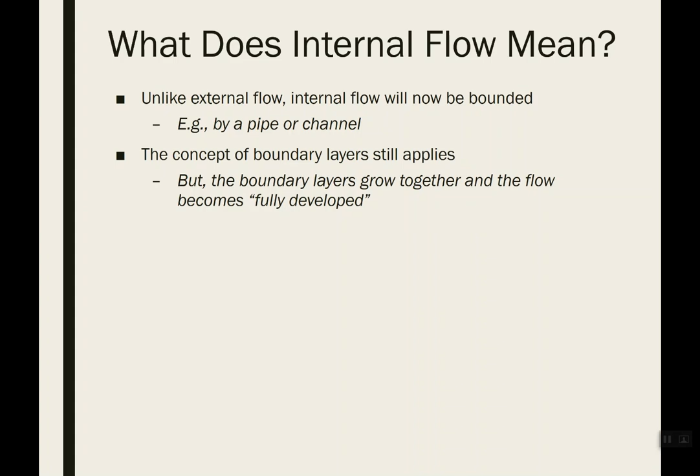Similarly, the thermal boundary layer, or thermal profile, is a little bit different, so fully developed is going to be defined a little differently, and we'll explain that as we go. Okay, so as I mentioned...

There's still this idea of a boundary layer. If you recall, when I talked about external flow, I used the example of flow going over a table. When the flow interacts with the leading edge of the table, you start to get friction happening, and heat transfer may occur if there's a different temperature between your surface and the bulk fluid. That still happens with flow through a pipe, except it only happens at the entrance where that boundary layer is still forming and growing - that's what we call an entrance condition, before those two boundary layers converge.

Once these boundary layers start to grow, eventually they run into each other and you get this constant velocity profile. From this point on, if you took little snapshots of the velocity profile, they'd all be identical going forward. In terms of heat transfer, your system might behave a little differently in this entry region compared to the fully developed region. The good news is, in the fully developed region, things level out and become constant, and it's much easier to deal with them mathematically.

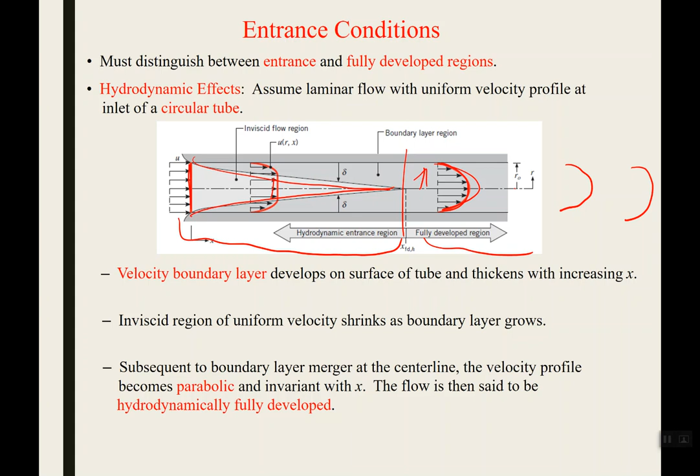So the velocity boundary layer develops on the surface of a tube and thickens with increasing x. You get this inviscid region where the uniform velocity shrinks as the boundary layer grows - here the velocity is all constant and uniform, which is called plug flow, which you'll learn about in kinetics, I believe. That inviscid region shrinks, and you get to a point where the velocity is never constant with respect to r, but it does become constant with respect to x.

The way you solve for the velocity profile is by doing a momentum balance. We don't really use that much in class other than being aware that you have this changing velocity profile with respect to the radius of your pipe. I'm not going to go into depth on that derivation unless you want me to—I'd be happy to do that in a later lecture, but I doubt you want me to. So you do a momentum balance and look at the shear stresses and how the different layers of fluid interact with each other, and you'd solve that to end up with an equation giving velocity as a function of r.

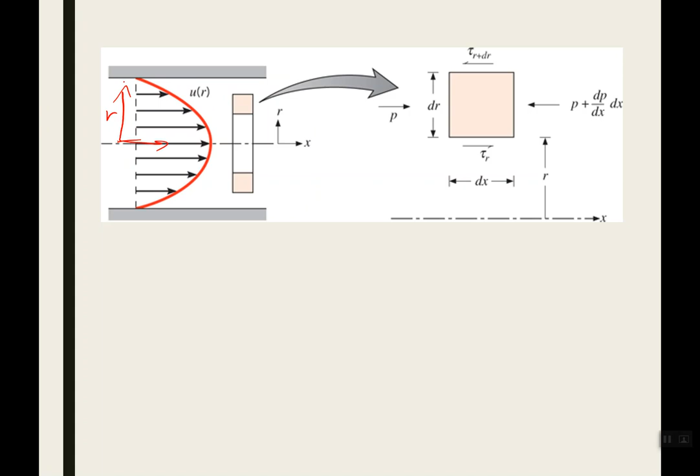So here's r. The x velocity is going to be highest at r equals 0, and lowest at r equals the inner radius of our pipe. We'll frequently be aware that there's an actual velocity profile, that the fluid is flowing fastest at the center of the pipe, and if we have a no-slip condition, it'll be 0 at the edges. We'll be aware of that general concept, but typically think of things in terms of the mean velocity.

The mean velocity is really just what you'd think of from your 2800 class—remember the formula, m dot equals rho times velocity times cross-sectional area. What you're really getting is the mean velocity, and instead of treating our velocity with some sort of shape, we just say, what's the actual mean, and treat the whole fluid as if it were all at that mean. You can get the mean velocity by integrating, if you knew the actual velocity profile. So if you had u as a function of r and x, you'd integrate that over the entire cross-sectional area, divide by rho times the cross-sectional area, and get the mean velocity.

So we won't really need to deal with that much other than remembering there is a velocity profile, but we'll typically just assume the velocity is uniform by calculating or using its mean velocity.

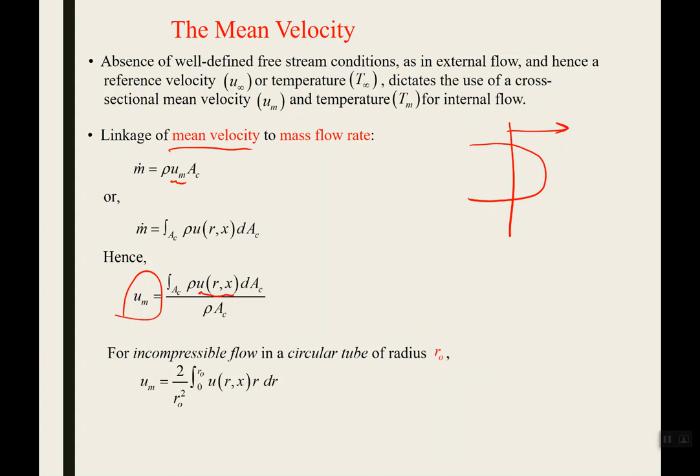We talked about entry lengths, just like with fluid flow over a flat plate, where when you encounter the leading edge of the flat plate, there's a different velocity boundary layer and a different thermal boundary layer. Recall we had formulas to calculate the velocity and thermal boundary layer thicknesses. I want you to remember that we treated velocity boundary layer and thermal boundary layer differently. Similarly here, you might have different hydrodynamic entry lengths than thermal entry lengths—your velocity profile may take a certain distance to develop, and that may differ from the distance it takes your thermal boundary layer to develop. Entry lengths depend on whether the flow is laminar or turbulent, which depends on the Reynolds number.

A Reynolds number for flow through a pipe or channel is defined as rho times our velocity times d divided by our fluid viscosity. That d has a subscript h, which refers to the hydraulic diameter. In the case of a circular pipe, the hydraulic diameter is just the diameter, so nothing to worry about there.

If your pipe is non-circular, like a square or rectangular channel, you calculate the hydraulic diameter as 4 times the cross-sectional area divided by p. Any guesses as to what p is? The perimeter, yeah. So as a sanity check, let's calculate the hydraulic diameter for a circular pipe. What is the cross-sectional area for a circular pipe?

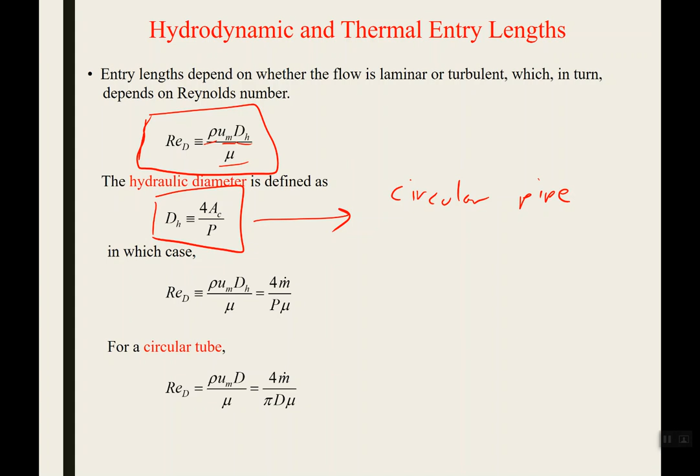Pi r squared, great, pretty easy, that's like 8th grade math. We can also express that in terms of diameter: 4 times A sub c, so pi fourths times the diameter squared. What's the perimeter of a circular pipe? 2 pi r, or pi times d. So the 4's cancel out, pi cancels out, and that ends up just being equal to d. So nothing to worry about.

We just use diameter to calculate Reynolds number for a circular pipe. But if it's not circular, then you'd have to go through this calculation of calculating the hydraulic diameter. So for a circular tube, our Reynolds number is just how we've always, the Reynolds number that we're familiar with, and you can put that in terms of mass flow rate by doing some algebraic manipulations.

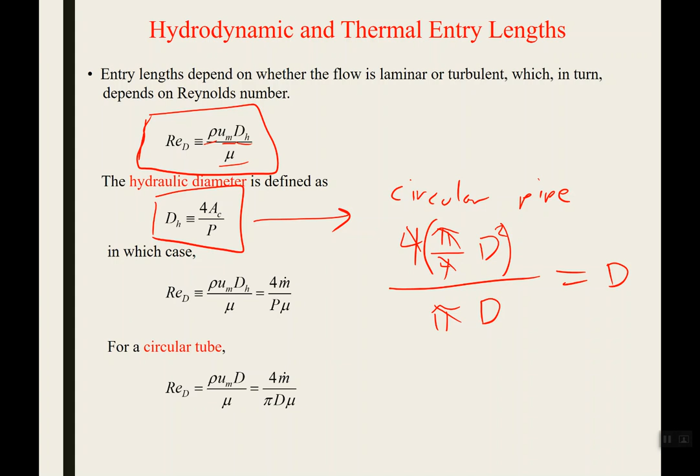Okay, so I've launched an interactive problem. I want you to calculate quickly what is the hydraulic diameter of a rectangular tube that's 5 centimeters wide and 3 centimeters tall, in centimeters.

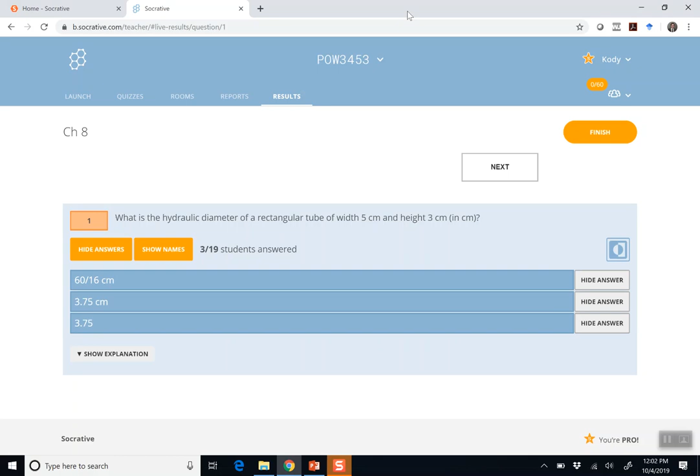I should have hidden the answers. Okay, so it is 3.75 centimeters. Good job.

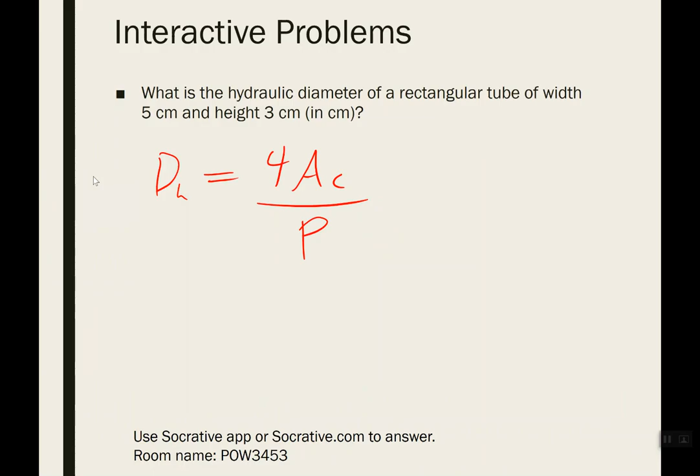So the hydraulic diameter is going to tell us a little bit about what the entry length is. Basically, this entry length is when those boundary layers are still developing, what happens at the very beginning of our pipe is going to be different than what happens after the flow becomes fully developed later on in the pipe. So that's sort of the motivation for talking about entry lengths, is we'll have to treat that entry length a little bit differently from a heat transfer point of view than we will the rest of the pipe.

So I'm sticking with the book standards. According to this particular textbook, the onset of turbulence occurs at a critical Reynolds number of 2300. What's the number you're used to from fluids? 2400. Okay, so this is about in that same range, this is not exactly a perfect science. So you'd start to get transition to turbulence when you have a Reynolds number of 2300 or greater.

And if it's above 10,000, then you can very safely assume that your flow is fully turbulent. So we get these little rules of thumb that tell us how long is our entry length, or how long does it take those boundary layers to develop, what's the section of pipe that we need to treat differently than the rest of the pipe.

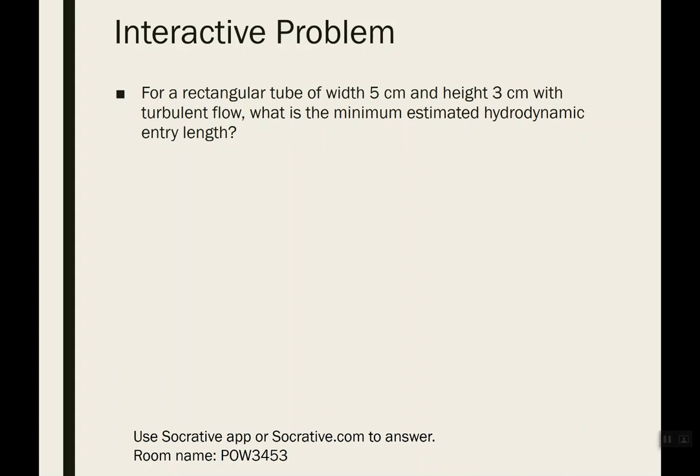So it's turbulent flow. Our hydraulic diameter was 3.75 centimeters. So we're asking for the minimum hydrodynamic entry length, so we'd use this 10. We'd assume that after 10 pipe diameters, our flow would be fully developed hydrodynamically.

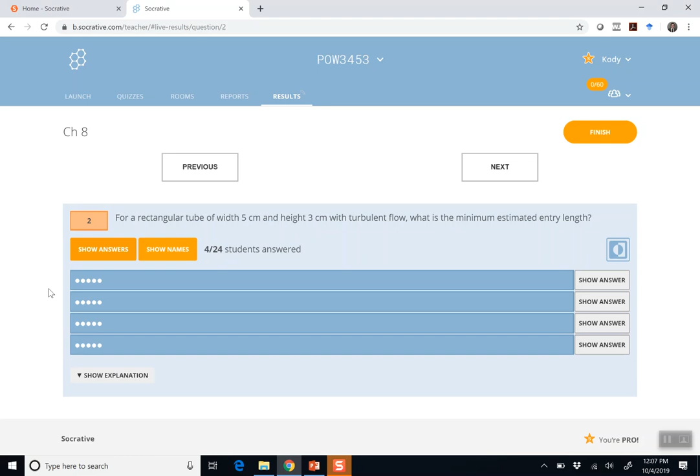All right, great. So our hydrodynamic entry length would be 37.5 centimeters. So what that means is for the first 37.5 centimeters, we're still going to have those boundary layers developing. After that, our flow is going to be fully developed, and we can treat our velocity profile as being fully developed. It'll also have some heat transfer implications that we'll discuss later.

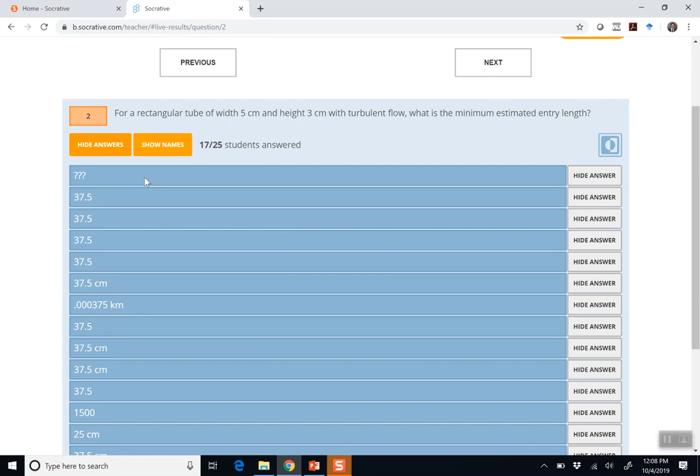Okay, so let's say that we have a pipe that is 200 meters long, and we're asked to do heat transfer analysis on that pipe. So our pipe is 200 meters long. How much of an impact is that hydrodynamic/thermal entry length going to have on our pipe?

Say that again? For the same pipe? Yeah, same pipe. Not very much. Yeah, so if our pipe is 200 meters long, and this is the first 37.5 centimeters of our pipe, it's really not going to matter. So in that particular case, we could say that our entry length is sort of negligible, and we could just treat the whole pipe as being fully developed, which makes our calculations a lot easier. Frequently, the problems will assume that flow is fully developed all the way down the length of our pipe.

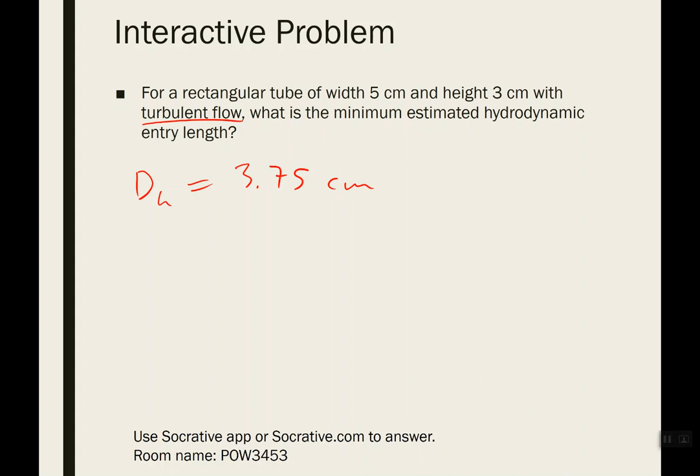Okay, so we can also get thermal effects. Similarly, when that flow enters our pipe, if we're assuming that it enters all at uniform temperature with respect to R, if we have a heated pipe, that heat is first going to penetrate the outermost fluid, and then eventually that thermal boundary layer is going to form. When those two thermal boundary layers merge, the flow is said to be fully developed here.

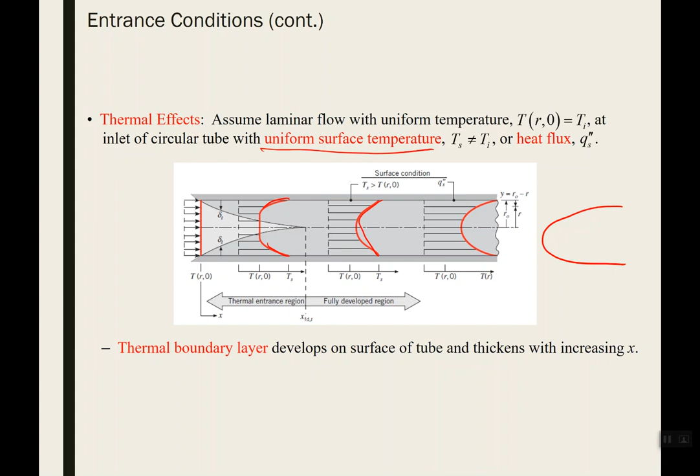Except there's a key difference here. In this particular case, if we had uniform surface temperature of our pipe, for example, what we would actually witness is that this gets more and more elongated the further down you go, because the pipe surface temperature stays the same, but your inner fluid still has this more extreme temperature difference. So we treat this a little bit differently.

Okay, so similarly to the mean velocity, there will also be a mean temperature, and our textbook treats this mean temperature, they denote it as T sub with a subscript M. I don't personally love that, but I'll try to stay as consistent with that as I can. So it's important to remember that there will be temperature gradients radially in your pipe. However, we'll typically treat our heat transfer correlations in terms of the mean temperature.

So we'll assume that our temperature is going to change with respect to X. That fluid, if it's a heating application and the pipe surface temperature is constant, our fluid's going to get hotter and hotter the further down it goes. But in reality, we'd still have temperature changing with R, but we could calculate the mean with respect to R so that we're only dealing with temperature change with respect to X.

So that's done similarly by taking an integration. We'd be integrating from 0, where the radius is 0, the very center of our pipe, and we would calculate the velocity times our temperature. Notice the temperature here is a function of both X and R. So we integrate that over the whole radius, and we end up with our mean temperature, which is a function of X only, because by taking the mean, we're going to neglect any temperature change with respect to R.

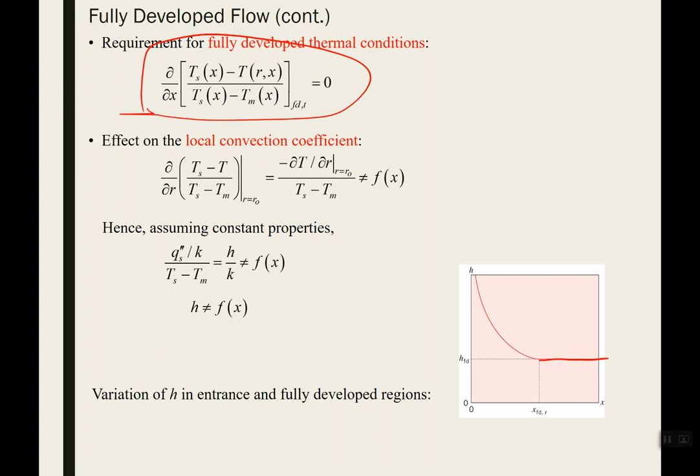Okay, so this mean temperature—I want to carefully explain again, the mean temperature means we're averaging our temperature with respect to R, but it's still going to be changing with respect to X. So we're basically treating our fluid as being uniform in temperature with respect to R, but it would be changing as the fluid is heated or cooled going down the pipe.

So to determine our mean temperature, we're going to start by doing a derivation. This is going to be a similar approach to when we've been using the heat equation or the thin fin equation. We're going to start by taking a differential energy balance. This is going to be an important concept to internalize.

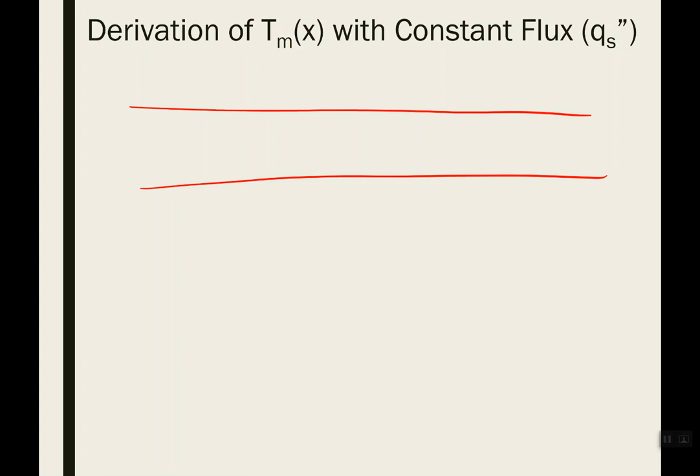If this is our pipe with X, we have our fluid coming in at a certain mean inlet temperature. Our approach here would be we want to calculate what's our mean temperature as a function of X. So I want to open this up to you—what should be our approach here to calculating our mean temperature as a function of X?

You're not raising your hand, you're just thinking, okay.

So we could do an energy balance here. We would take our pipe and break it up into these discrete volumes. Let's say we're going to look at this particular volume, so we're going to have flow coming in and flow going out. We're also going to have energy coming in with a constant surface flux of Q sub S.

Okay, so how do we do an energy balance? Accumulation—and I didn't specify this, but let's do this at steady state, so our accumulation will be 0. Then we're going to have in and out. I also didn't specify this, but let's assume we have no generation, just a fluid flowing through a pipe. This is a little bit different than the rate terms we've used before.

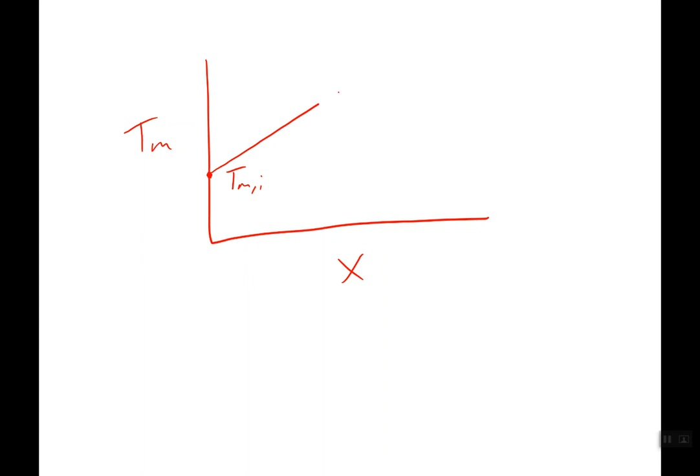Okay, so that's how we get that equation. That's actually going to be an important concept. As trivial and as simplistic as that may seem, that methodology—doing an energy balance, breaking your system up—can help you solve a wide range of problems.

And we're going to be doing another flipped classroom kind of thing with a problem like this the week after fall break.

If we have uniform surface heat flux, we are going to expect our mean temperature as a function of x to do something like this. What that would mean, if we're dealing with an entrance region, is that our surface temperature is going to vary in this particular case.

So providing, under this assumption that we have constant heat flux, it's still ultimately heat getting into our fluid from the pipe by convection. It's just that our boundary condition is this constant heat flux.

So what would happen physically is that our surface temperature is going to have to change so that in the fully developed region, this delta T is going to be constant the whole way. However, because in that entrance region our H may be changing, you may actually see some nonlinear behavior for our surface temperature in that entrance region.

This isn't particularly important. Okay, so now let's shift gears a little bit, and I want you to think through this problem.

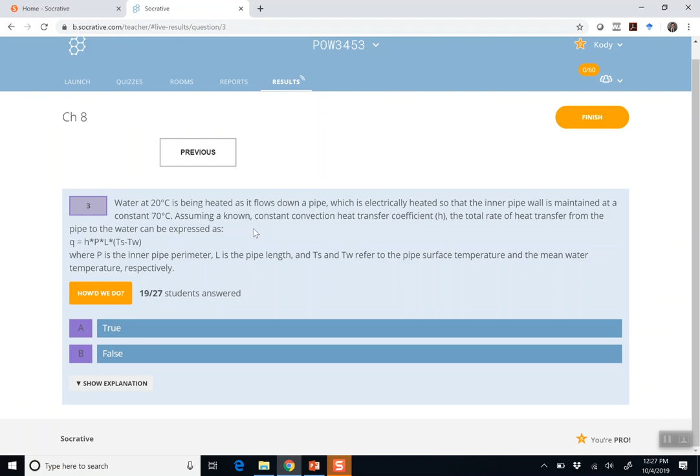Okay. Anyone else want to take a crack at it? Caleb? Okay, that may be the similar thing that you're saying—the temperature of the water shouldn't be a constant.

Okay, so let's see how we did. All right, I'm surprised by this actually. So the correct answer is false. So it is false. Alex and Caleb are both correct. Let's get into a little bit more why.

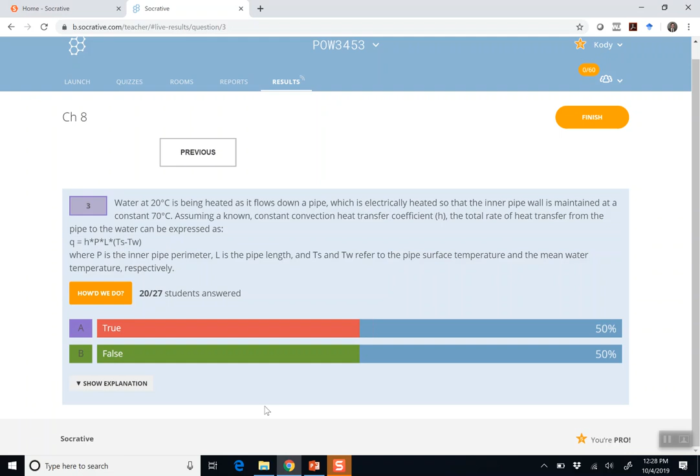Why does this traditional form of Newton's law of cooling no longer apply in this particular case? One thing to remember is that, as Caleb pointed out, our water temperature is actually a function of x, so it's going to be changing. If we treated everything else in this problem setup as constant, that means our Q, or our flux, would be a function of x. So our total Q we're going to have to find in some different way.

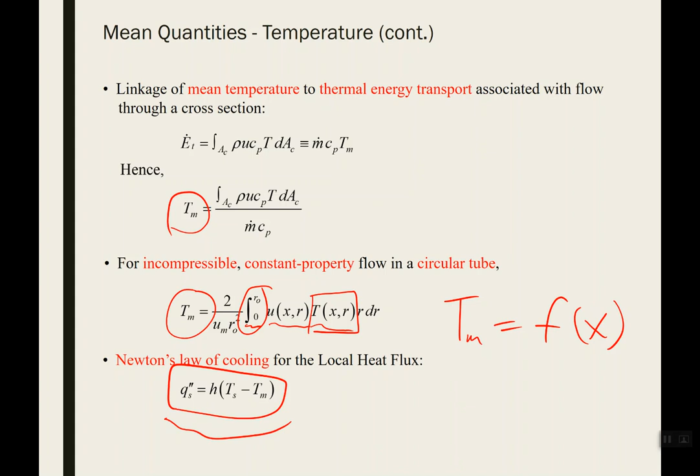So while, as I said on a previous slide, Newton's law of cooling would still apply in this flux form, at any particular instant we could calculate the flux. However, over the whole length of the pipe, because our fluid temperature changes down the length of the pipe, we've got to reformulate how we calculate the total amount of heat going into our fluid.

So that takes us to this next derivation. A similar kind of setup, but now instead of constant flux, we have a constant surface temperature, Ts. So how are we going to approach deriving this temperature profile?

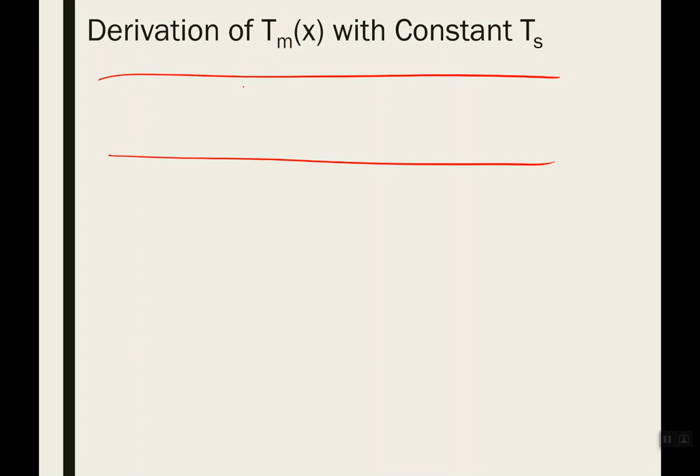Okay, Titus is a couple steps ahead. It's going to be with an energy balance. So similarly, this is just such an important concept to figure out, to know and understand how to do these energy balances.

So if this is our x, here we have x, and then here we have x plus delta x. Again, let's stick with steady state. So we're going to, and I'm going to skip through the accumulation steps. You guys can go back and do that on your own.

So we'd have m dot cp, our mean temperature evaluated at x, subtract our mean temperature evaluated at x plus delta x. Now instead of that constant flux term, we're just going to put in the actual convection term: H times Ts minus our mean temperature, and here is our perimeter and delta x. So this is our advection in term, here's our advection out term, and here's our convection in term.

So we didn't skip too much. We're doing this so heat is coming into our fluid, so the surface is hotter, so we're treating that as a positive term, assuming our surface temperature is hotter than our mean temperature at this particular point. So we treat that, we add that in.

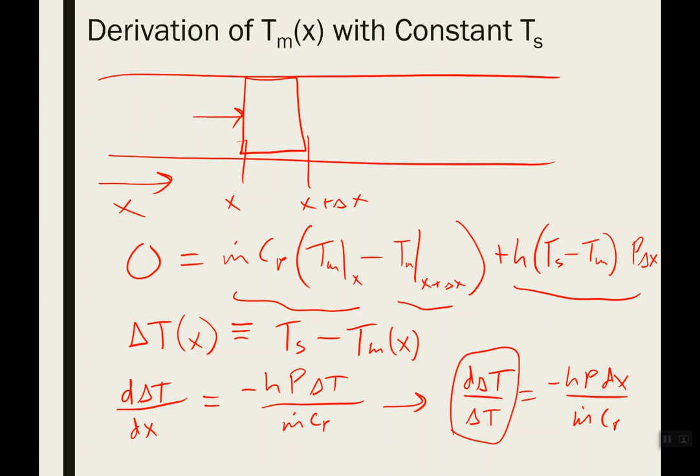So first, the solution here is natural log. So we would get, if we integrated this guy, and I'm going to do a definite integral here, but you could still do it with the boundary condition. I mean, still do this in general form and then apply boundary conditions.

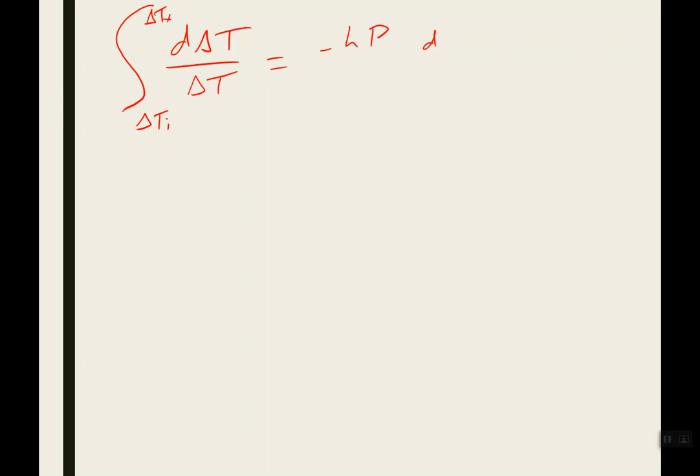So our delta t at the pipe inlet, that's this delta ti, up to our delta t at a particular x, is going to equal minus hp over m dot cp times the integral from 0 up to our x. So when we do that integration, we end up with the natural log of delta t at whatever x divided by our delta t at the pipe inlet is equal to minus h times p times x over m dot cp.

Okay, so then solving this for delta t at x, we get our delta t at any given x is equal to our delta t at the pipe inlet times e to the minus hp times x over m dot times cp. So now we can just solve for what our x is.

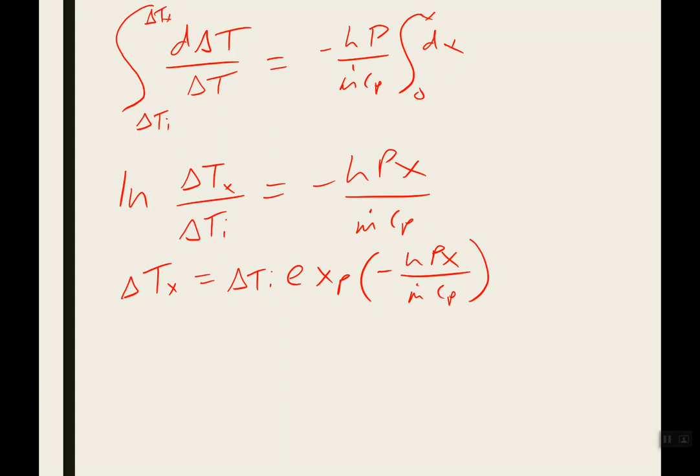So our mean temperature at x is equal to our surface temperature, so remember that surface temperature was embedded into our definition of delta T, minus Ts minus Tmi, multiplied by e to the minus h p x over m dot cp.

Okay, so it's important to understand the math and the derivations and where these come from, because you may have other circumstances, and it's important to master this skill of doing a differential energy balance and integrating it to get an equation, because your boundary conditions may change, or your inlet conditions may change, or you may have something that changes dynamically. So it's important to be able to take a concept like this and turn it into an equation.

However, it's also important to have some intuition of what this looks like. So let me just ask, does anybody feel like they could plot this equation based on just having an intuition of the system? How does this equation look? Or what does this temperature profile look like? So let's get rid of the actual equation and think about just the physics of the system.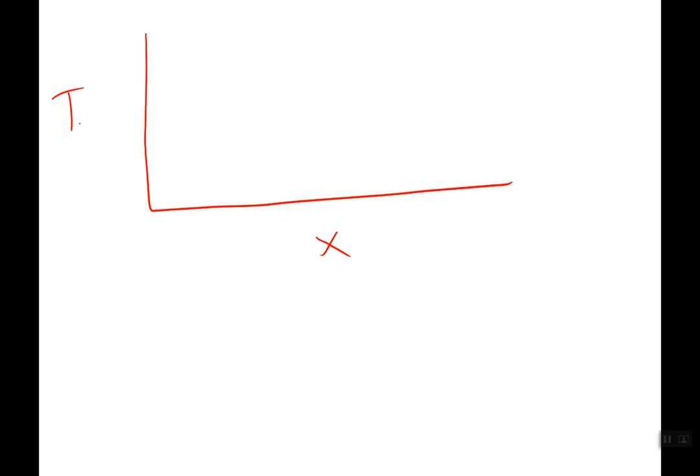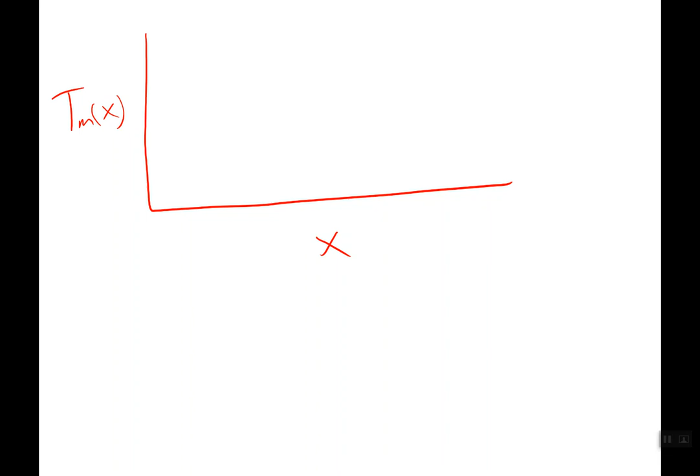So here's X, here's our mean temperature. If you remember, when our condition was constant surface heat flux, our equation was just a straight line. Our temperature just kept increasing linearly the further the fluid went down the pipe. So now we have our constant surface temperature. So if I plot our surface temperature, it just looks like that. Okay.